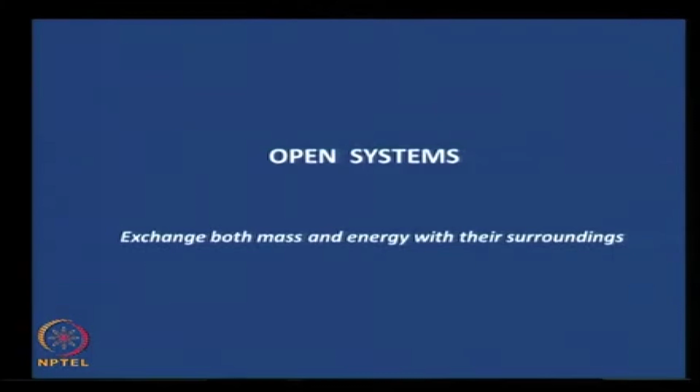To make things simple, let us begin with one input stream and one output stream. We will derive the relevant expressions for one input stream and one output stream for a particular system, and then generalize it for many input streams and many output streams.

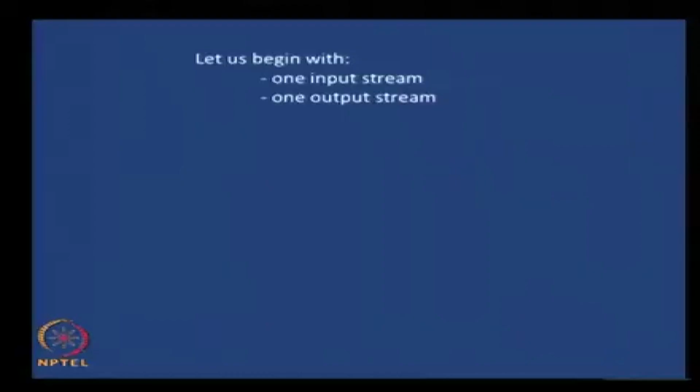Let us call the rate of heat interaction across the system boundary. As we have seen, this heat interaction and work interaction makes sense only when they cross the system boundary. The rate of heat interaction across the system boundary, let us denote that by Q dot, which brings in the rate aspect, the time rate, and the rate of work interaction across the system boundary is W dot. This is our terminology.

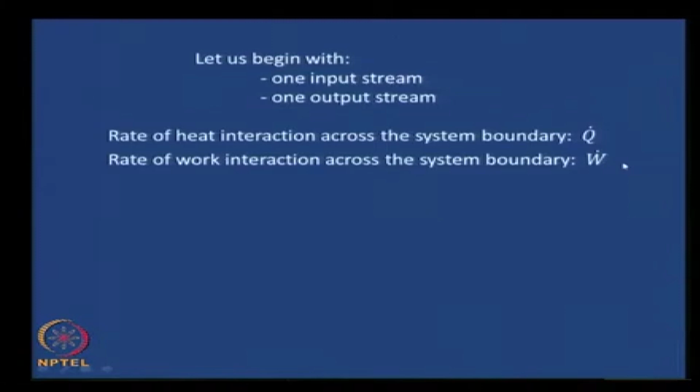Now let us write an energy balance. We had written mass balances earlier; now let us write an energy balance. Unlike mass, energy can neither be created nor destroyed, that we all know, or in other words it cannot be generated or consumed. Therefore the generation and consumption terms need not be taken into account whenever we consider energy.

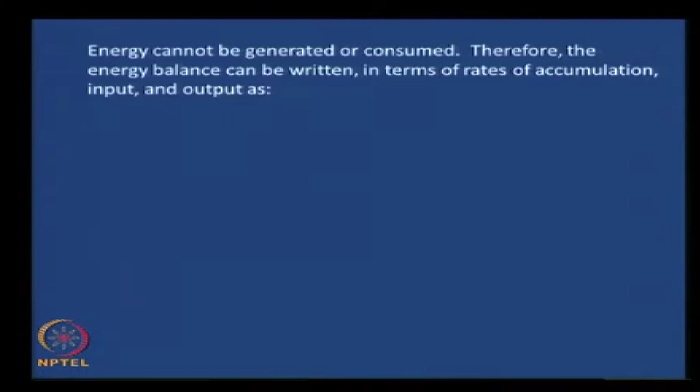The energy balance, written in terms of rates of accumulation, input and output—those are the other three remaining terms in a balance apart from generation or consumption—can be written as: d/dt of the energy of the system, the total energy of the system, equals the rate of energy input into the system, EI dot, minus the rate of energy output from the system, EO dot.

It is quite intuitive, straightforward to see. There are no other terms that can be included in this. If you want to think about it, please go ahead and do that—you will realize that there are no other terms that can be included. It is very fundamental, a simple balance.

See, all these balances are just like accounting in finance, where you have a credit, a debit and a balance. So where you put things in is what makes the difference. It is as simple as that. So we have an energy credit and an energy debit and the balance.

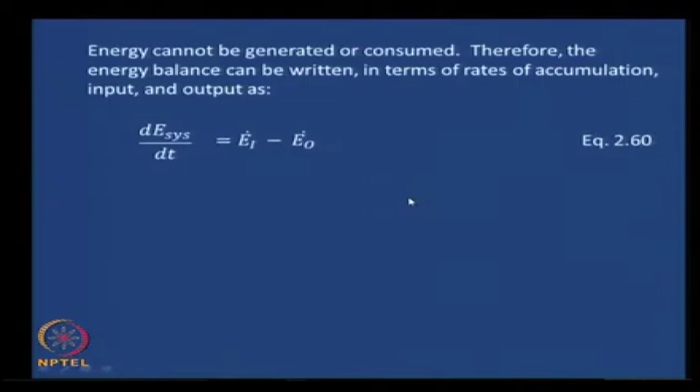Let us call this equation 2.60.

If you look at the input rates for the system under consideration, let us take a look again at the system under consideration. The energy input could be due to the stream itself and the heat interaction in the system that we have started to consider—that is, it has one input stream, one output stream, and energy interaction of heat interaction Q and work interaction of W, or the rates of that as Q dot and W dot.

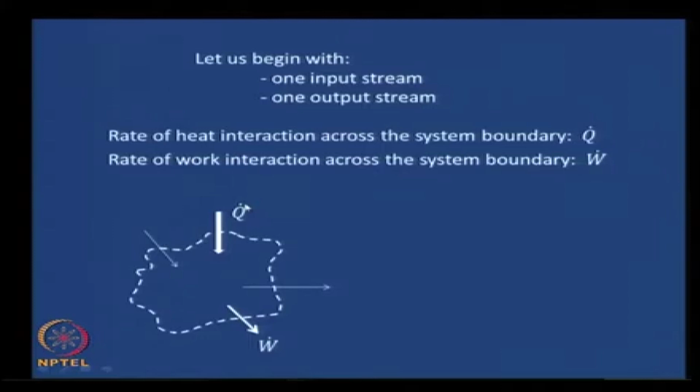Therefore, the input rate is due to the streams and the heat interaction. Similarly, as we have seen in that figure, the output rate could be due to the streams itself, the energy that is carried by the streams and the work interaction.

If you think about it, this heat interaction and work interaction can be accounted for in any place. You could account for it in the input or the output, as long as you choose your signs appropriately. Let us not get into that. We will take the intuitive route and account for the heat interaction in the input rate, and the rate of work interaction in the output rate. It is kind of intuitive in the way we have written our system.

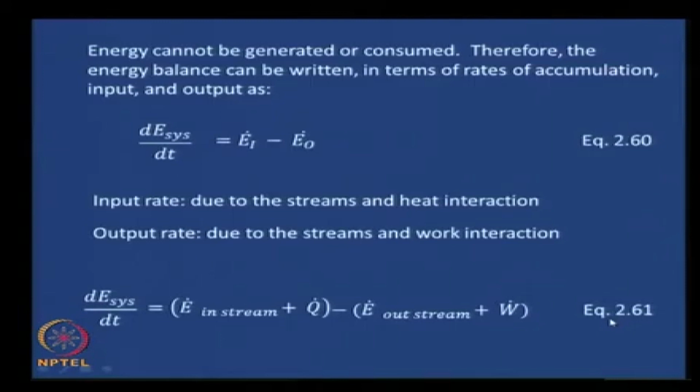If you take this into account, we can write equation 2.60 that we have seen here, simple energy balance, as d dt of E of the system equals, we are explicitly showing the various contributions: EI dot, which could be E dot of the inlet stream and Q dot, plus Q dot, and similarly minus this EO dot term consisting of E dot of the outlet stream and W dot. Let us call this equation 2.61.

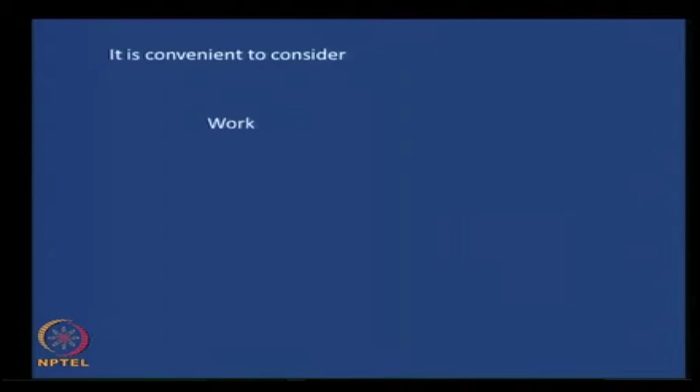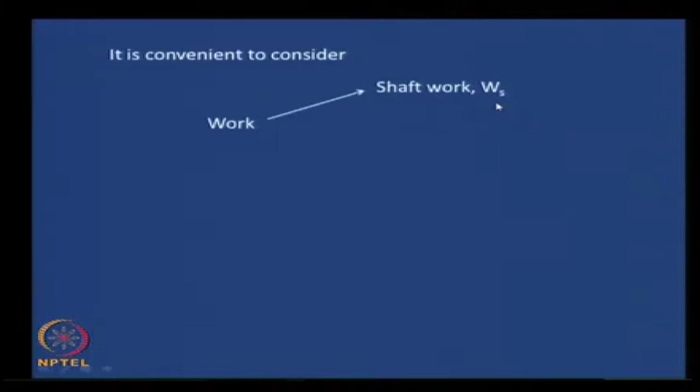Now, it is convenient to consider two kinds of work. Let us assume that only these two kinds of work exist. One is shaft work, Ws. You can go back to your early days of thermodynamics where you would have learnt this, shaft work, and PV work, work due to pressure-volume expansion. Let us consider that these are the only two work interactions. If there are other work interactions, you just have to add them to this, it is quite simple, we can do that later also. For development, let us consider only these two work interactions.

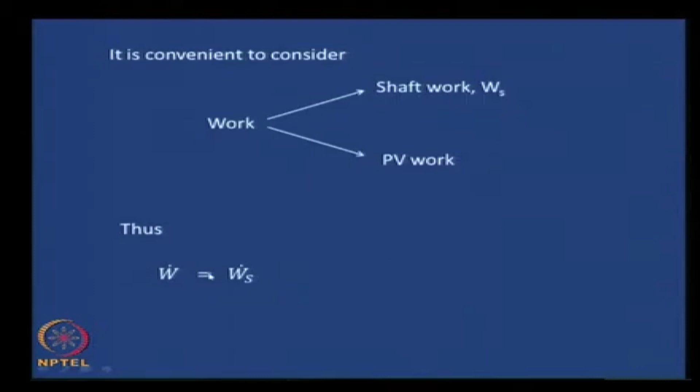If we do that, then the W dot term can be written as Ws dot, the rate of shaft work, plus the rate of PV work going out minus the rate of PV work coming in. Note that this is PO VO hat, the mass specific volume of the streams, and you can work out the units here. If you multiply it by the mass flow rate of the outlet stream, you get the rate of work interaction that crosses the system boundary due to PV work. Similarly, this is the rate of work interaction that crosses the system boundary into the system through the inlet streams. We will call this equation 262.

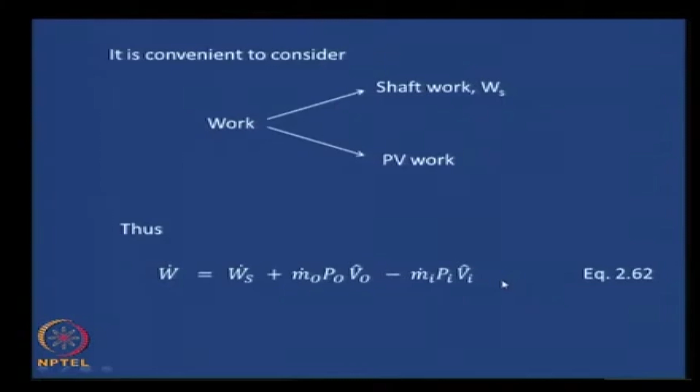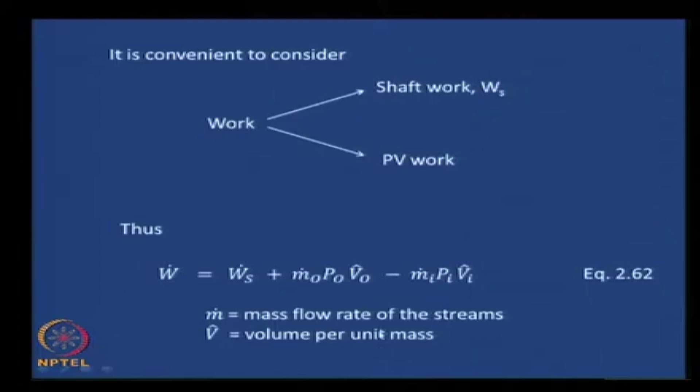Let me state this again: m dot is the mass flow rate of the streams, and V hat is the volume per unit mass. It is nice to have this in a complete form here, the first time we are introducing these things.

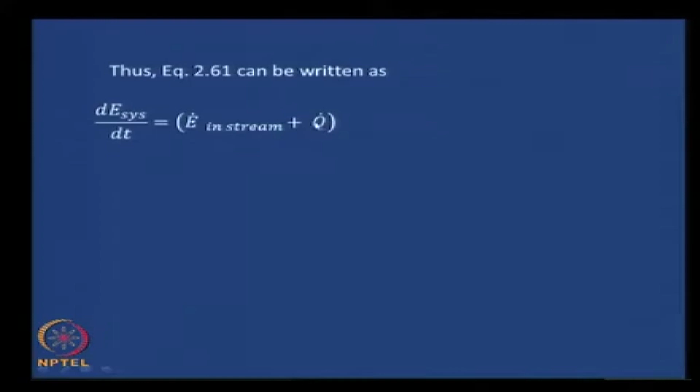Now, this equation 261 that we just wrote can be written as d dt of E of system, the accumulation term, equals the rate of E of the inlet streams plus Q dot, minus E dot of the outlet streams. All this is from earlier. The only thing we are doing here is expanding the W dot in terms of the shaft work interaction as well as the PV work interaction.

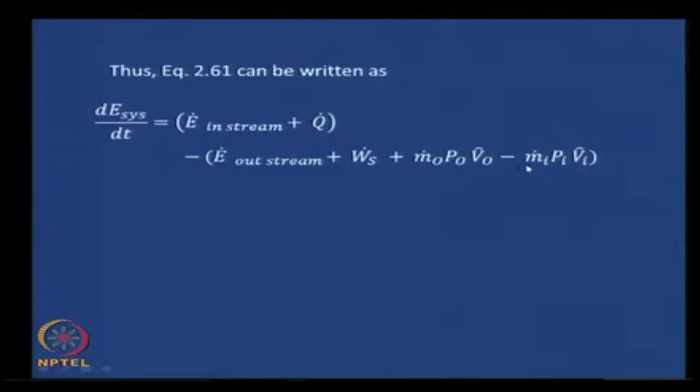So, plus Ws dot plus Mo dot Po Vo hat minus Mi dot Pi Vi hat. Now, if you transpose this, take terms to one side in our standard way: E dot of the outlet stream minus E dot of the inlet stream, there is a minus here and a plus here, so it is actually a minus, you have plus Mo dot Po Vo hat, and this minus-minus becomes a plus here, on the other side minus mi dot pi vi hat, plus d dt of E of system, equals whatever remains here, q dot minus ws dot. We will call this equation 263.

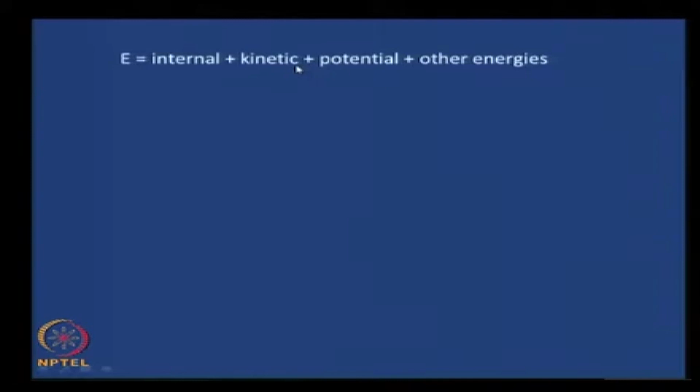Now, let us look at E in a little more detail. This E is the energy of the system that can consist of internal energy, kinetic energy, potential energy, surface energy, electrical energy, and so many other energies it could be. Using the regular expression for energies, let us see whether we are generalizing it here.

This equation 2.63 can be written, reasonably generally, as MO dot times internal energy plus kinetic energy, which is half UO squared times MO dot, that is a rate here, that is why you have a dot, plus the potential energy term GZO MO dot, plus whatever terms you want to put in for the other energies, plus the PV work MO dot PO VO hat, this is for the outlet stream, minus Mi dot Ui, internal energy hat, specific internal energy, multiplied by the mass flow rate here.

Therefore, you need a specific value here: Ui hat plus half Ui squared, this is the kinetic energy term, plus G Zi, the potential energy term for the inlet stream, plus the other terms corresponding to the other energies, plus the PV work term Pi Vi hat. This equals plus d E of the system dt, equals q dot minus Ws dot.

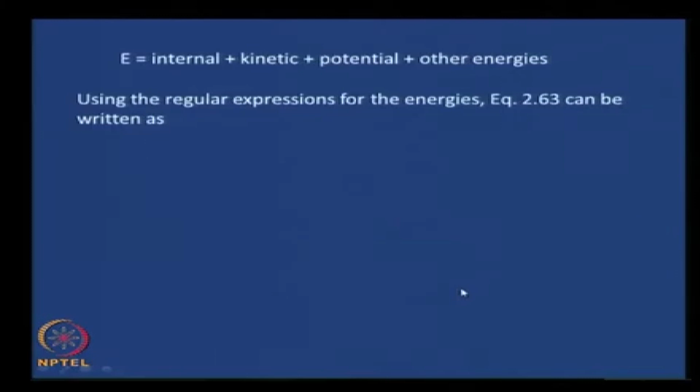Essentially, we have expanded the E of the outlet streams and the E of the inlet streams and then put the various terms together. We will call this equation 2.63.

Now, since enthalpy equals U plus PV, there is a need to bring in enthalpy here because the enthalpy values are probably easily available. Enthalpy equals U plus PV. This is equation 2.64.

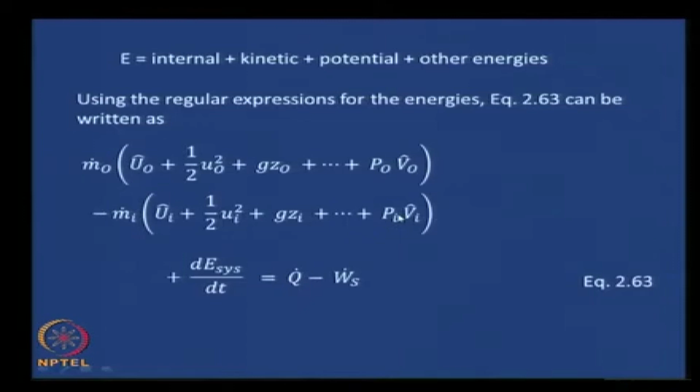If you look at 2.64, you have UO hat plus PO VO hat. Therefore, you have an enthalpy term right here by this combination, and enthalpy values are probably more easily available. Therefore, let us combine them and write this as MO dot times HO hat, the specific enthalpy of the outlet stream, plus the kinetic energy term half UO squared, plus the potential energy term G ZO into MO dot, plus the terms that correspond to the other energies, minus the corresponding things for the input stream: Mi dot into Hi hat plus half Ui squared plus G Zi plus the other terms, plus d dt of the E of the system equals q dot minus Ws dot. Let us call this equation 2.65.

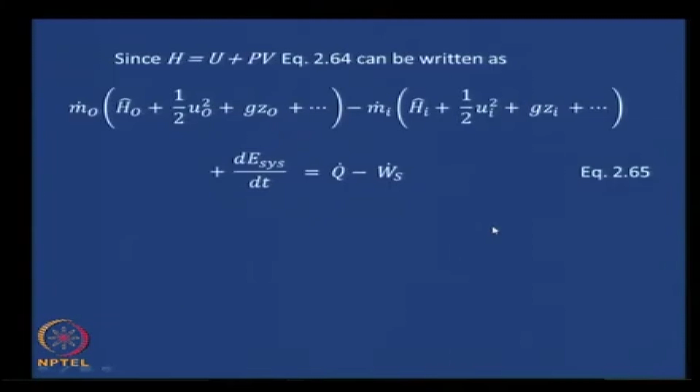Now, if the mass flow rates of the input and output streams are the same - they are typically the same, otherwise there will be accumulation - mathematically MO dot equals Mi dot, and let us call that by a simple M dot after dropping the subscripts because they are the same.

If that is the case, and we indicate output minus input by the delta - you see there is an output here, there is an input here, there is a minus here - if you can indicate that by the delta, then we can write M dot, take out, then HO hat minus Hi hat becomes delta H hat, plus half of UO squared minus Ui squared becomes delta U squared, plus G of ZO minus ZI becomes G times delta Z, and hopefully you can write the other terms in terms of the differences, indicated by the dot dot dot, for the terms that correspond to the other energies, plus the remaining terms d dt of the E of system equals q dot minus Ws dot. We will call this equation 2.66.

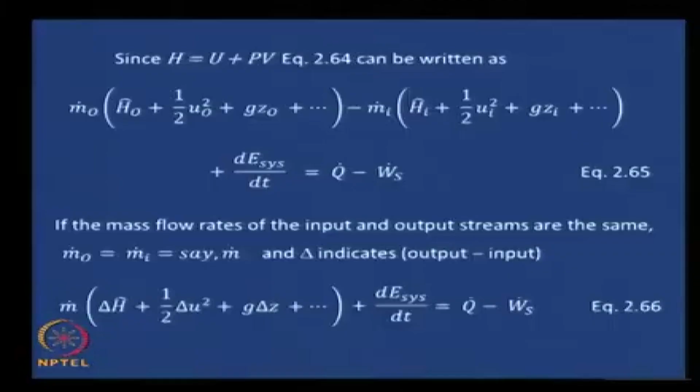Now, if we generalize things, we have it in a form that can be easily generalized. If there are multiple streams, for example C input streams and D output streams, the energy balance is nothing but summing over all the output streams and summing over all the input streams and subtracting one from the other. Energy is a scalar, it can be subtracted.

Therefore, sum over D output streams of mj dot - j is the index for the outlet streams - mj dot times hj hat plus half uj squared plus g zj plus the terms corresponding to the other energies of these streams, minus sum over C input streams, where k is the index for the input streams, mk dot times hk hat plus half uk squared plus g zk plus the other specific energy terms of the streams, plus d dt of E of the system equals q dot minus Ws dot. So now we have a nice general equation that can be applied to any open system that exchanges mass and energy with its surroundings.

I think there is an equation number, equation number 2.67. So this is a nice equation to remember.

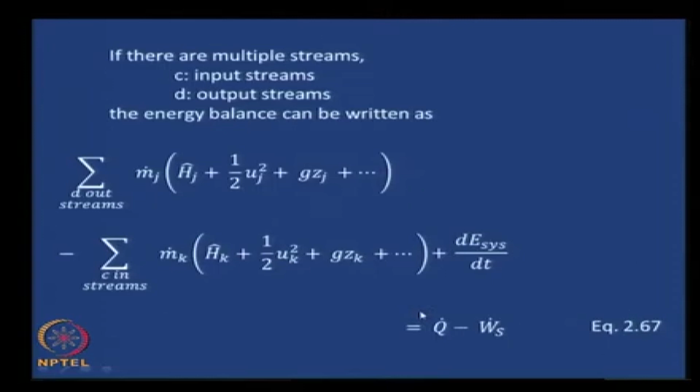As usual, we would look at how to apply this equation to get more familiar and also to develop the higher level skill of application. Let us take a typical example and apply the energy balance to that.

Steam is used for various purposes in the bioprocess industry. Steam is used to sterilize the central part of the bioprocess, which is a bioreactor. Sterilization is essentially to create an environment where there is no microorganism, and then we add the microorganism of interest to us, so that only that microorganism grows. Otherwise, there are so many microorganisms present in the air all the time, and if we do not sterilize, if we do not eliminate all of them, then whatever is available in the air will grow along with the organism of interest.

There would be competition for the food that is available, which may not be desirable for the optimal production of the product. Therefore we sterilize things, we make sure that we have a clean slate when we start, and under sterile conditions we add the microorganism of interest into the bioreactor and let that organism grow and produce the product of interest.

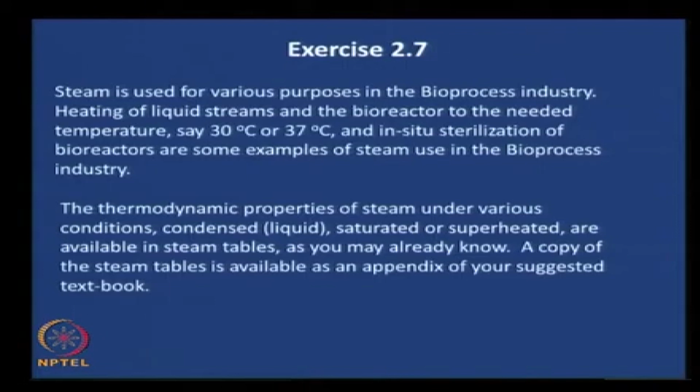What does saturated mean? Recall the phase diagrams that we reviewed in the first module. We had a PT diagram, pressure versus temperature diagram, and there we had the fusion line, the vaporization line. Let us focus on the vaporization line. The points on the vaporization line correspond to saturated conditions, and if steam is in that state, it is called saturated steam. Or if you look at a PV diagram, pressure versus specific volume, we had a dome, and the conditions inside the dome correspond to the saturated conditions. Superheated, of course, we know is completely a vapor. Therefore these two are the ones that are usually of interest to us.

The thermodynamic properties of steam under various conditions, saturated or superheated, are available in steam tables, and a copy of the steam tables is available as an appendix of your suggested textbook, Smith, Van Ness and Abbott. Please take a look at that appendix and familiarize yourself with the various values that are given there as functions of pressure, temperature, or maybe one variable.

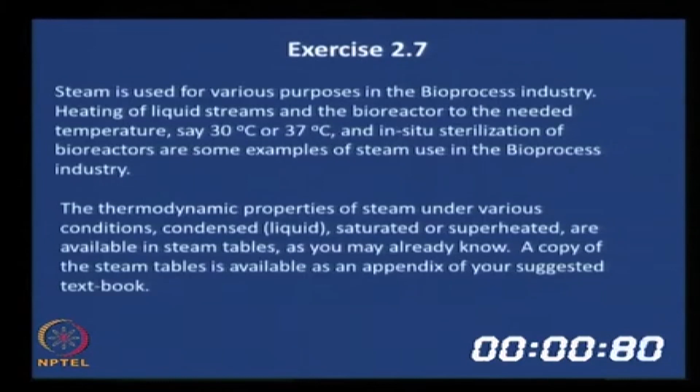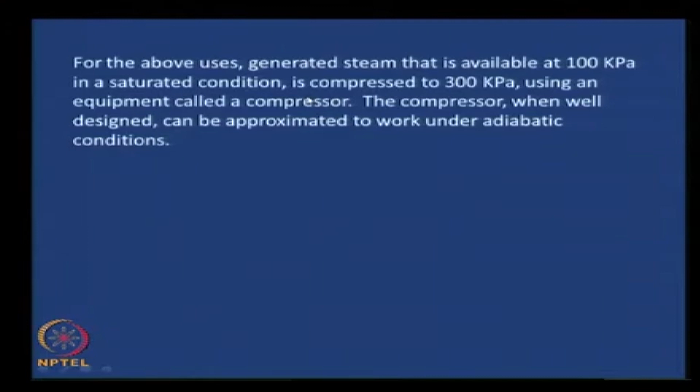Now that you are familiar with the steam tables, how it looks like, what are the various values there and so on - for the above uses, the generated steam that is available at 100 kilopascals in a saturated condition is compressed to 300 kilopascals using an equipment called a compressor. You might have already heard of a compressor. A compressor essentially does compression, increases the pressure. Here it has gone from 100 kilopascals to 300 kilopascals.

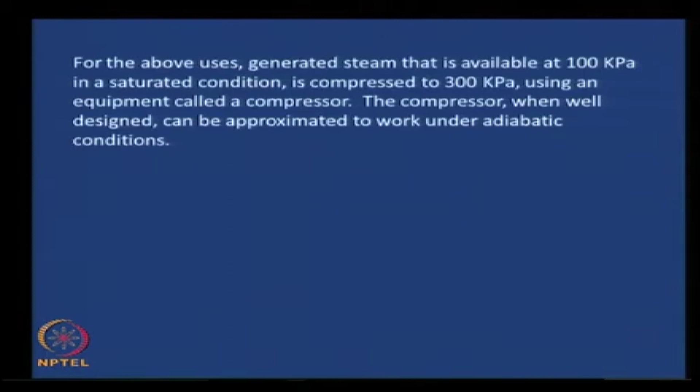The compressor, the equipment, when well designed, can be approximated to work under adiabatic conditions, which means it can be assumed that there is no heat interaction between the compressor and the surroundings.

Such compressors do not have much difference in the entry and exit elevations, ZO and ZI. The pipes are also sized to equalize entry and exit velocities, therefore the small UO equals the small UI.

The compressor efficiency, defined as the ratio of the maximum or isentropic work to the actual work, is 0.8. What we are expected to do in this exercise is estimate the work needed to operate the compressor per kg of steam compressed for steady state operation.

This is a very typical calculation. The work needed to operate the compressor per kg of steam compressed translates directly to the energy costs required for the compressor. Some compressors are huge energy guzzlers, so it's good to have an idea of the energy that goes into compressor operation.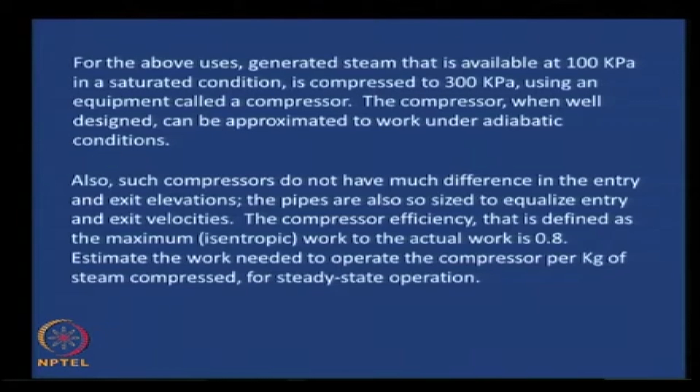Thermodynamic application of principles, especially the final equation we derived for open systems, is going to tell us that. Let me start you out with the solution, and then probably you can take some time to work it out, then I will give you the final solution.

The thermodynamic properties of steam can be obtained from the steam tables. For saturated steam, you need to look at the saturated steam tables, either on the line on the PT diagram or under the dome for the PV diagram. You need to have this idea in mind when you look at steam tables.

For saturated steam at 100 kilopascals, which is the inlet condition, the enthalpy value given in the table is 2675.4 kilojoules per kilogram, a specific value per mass, and the specific entropy is 7.3598 kilojoules per kilogram per Kelvin. So this is some data for you to start out with.

Take a look at the equation we developed and see what values can be obtained from the steam tables, substitute the values and get the final solution. Maybe some help might be required towards the final solution in terms of how to get the work done, and we will come to that. At least look at the steam tables now and substitute the values into the energy balance expression. Go ahead, take about 10 minutes to do it.

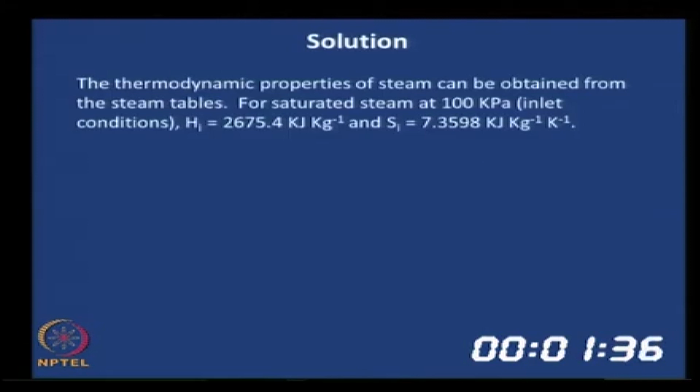Okay, let us move forward.

If an isentropic compression is considered, and this is the limiting value, we know in an isentropic process the entropy remains constant, so we will make use of that point. Therefore, the entropy at the outlet must be the same as at the inlet, 7.3598 kilojoules per kilogram per Kelvin.

Now, by interpolation in the steam tables, we are going to linearly interpolate. This happens to be in between the values given in the steam tables, so we assume in that narrow range the variation of enthalpy and entropy is linear. If we interpolate, you take the value above 300, below 300, take the entropy value, in this case enthalpy value, and for this much change in temperature you get this much change in entropy or enthalpy.

Therefore, for the difference that corresponds to 300 kilopascals from its previous value, what would be the change in enthalpy that needs to be added to the value before or below 300 kilopascals - that is the way we need to go about it. Please do that, and if you have any difficulty you can always clarify later.

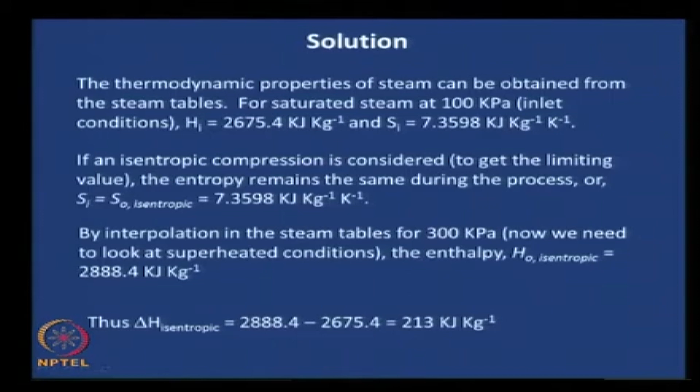Now, application of equation 2.66 to our system. We need to very clearly identify what our system is, as we discussed earlier. If we do not identify a system clearly, it could be a mess. Applying balances to one system at one time, and another system at another time, in the same problem can lead to a lot of confusion.

Applying equation 2.66 to a system, with the compressor chosen as the system, we realize delta U squared equals 0, because the condition given is equal velocity of entry and exit streams. If you recall the problem statement, the pipes are sized such that there is no velocity difference between inlet and outlet. Also G delta Z equals 0 because Zo equals Zi, no appreciable difference in elevations of entry and exit streams.

This was given, so we can take this term to be 0, and since it is a steady state process, this term automatically goes to 0. d dt of any quantity in a steady state process can be taken to be 0 - that is the definition of a steady state process, no variation with time at a particular point. All time derivatives are 0, and q dot equals 0 because the compressor works adiabatically - there is no heat exchange between the compressor and its surroundings, therefore q dot equals 0.

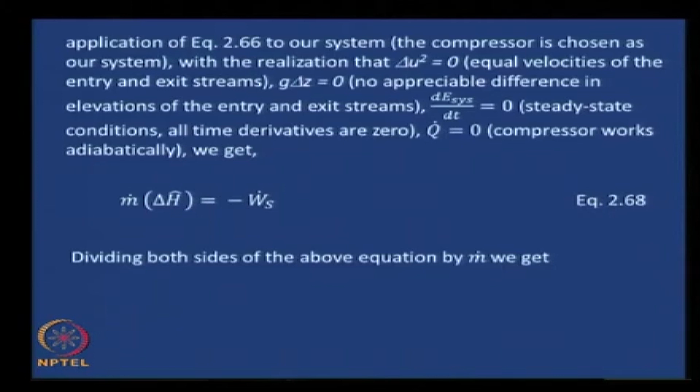We will call this equation 2.68. Now if we divide both sides of the equation by m dot, we get m dot delta H hat equals minus Ws dot, and if we divide by m dot, we automatically get minus Ws - the rate part goes away. This is per unit mass - you need to recognize that this is shaft work per unit mass. Let us call that equation 2.69.

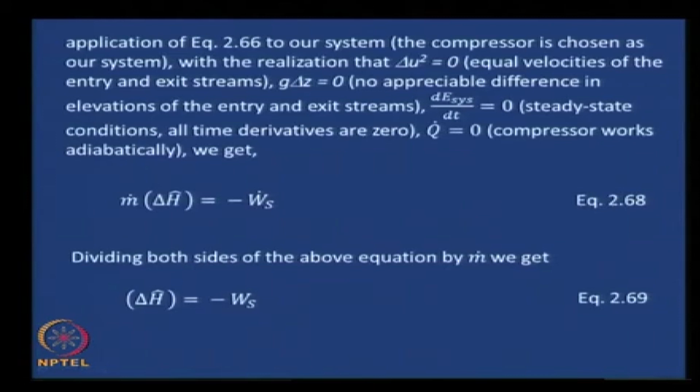The compressor efficiency, which was defined as the ratio of isentropic work, the maximum work possible, to the actual work - this is the compressor efficiency definition we saw in the problem statement - can therefore be expressed in terms of the enthalpies, that is delta H isentropic hat divided by delta H hat. And as we know, these values we can get from the steam tables - we already got those values. So let us substitute that.

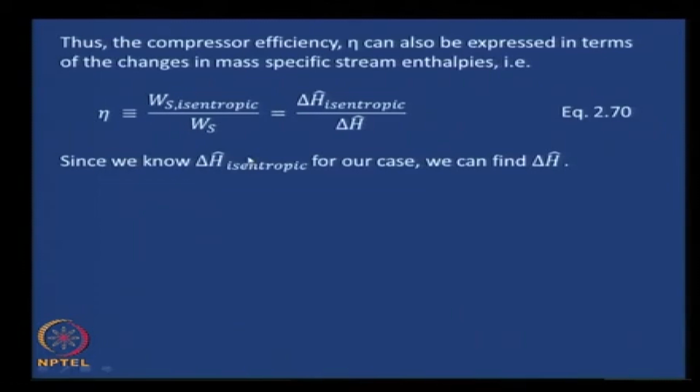We know delta H isentropic for our case, we can find delta H and therefore the work requirement. Delta H, by transposing this equation, turns out to be delta H hat isentropic divided by eta, the efficiency of the compressor, which is given as 0.8, and delta H isentropic hat we have already calculated as 213. Therefore, 213 by 0.8 turns out to be 266.3 kilojoules per kilogram. This is delta H hat.

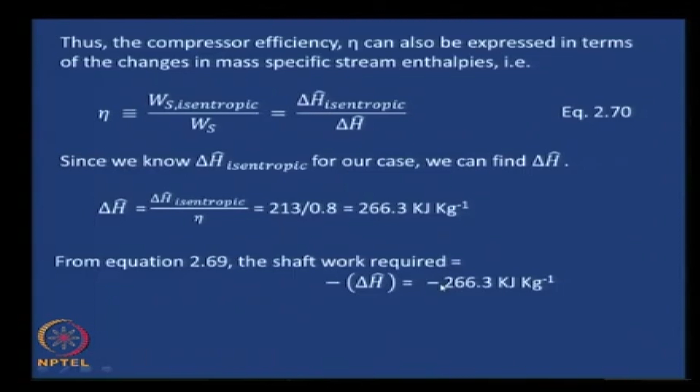From equation 2.69 we have already seen that the shaft work required, Ws, that is shaft work per unit mass, is minus delta H hat, which is minus 266.3 kilojoules per kilogram. You might wonder about this minus sign - why are we even looking at it, what sense does it make? That minus comes in because of our convention. Note that the negative sign indicates that work is done on the system, which makes sense - work needs to be done on the compressor for it to work, and this minus just indicates that work is done on the system.

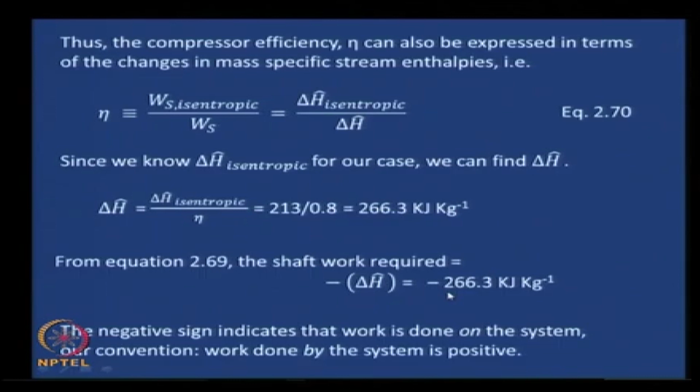We do not have to worry about that anymore. Our convention has been that work done by the system is positive, therefore work done on the system is negative - that is all this indicates. Therefore, an amount of 266.3 kilojoules per kilogram of steam work needs to be done on the compressor.

With this we complete module 2. In the next class we will begin with module...